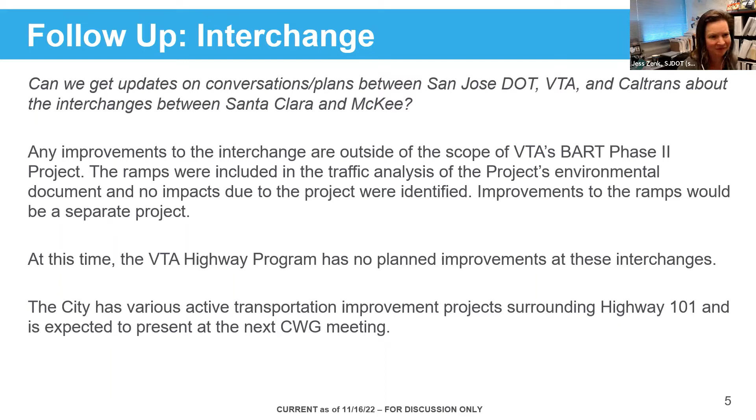Cool, thanks, Jess. Passing it over to Erica to talk a little bit about the role of the BSV External Affairs team. Erica, over to you. Thanks. Today, next slide. Just wanted to talk through what our team, who comes to meet with you quarterly, what our role is on the project, to make sure that you all have a clear understanding.

So our team falls into two major categories: community outreach and stakeholder coordination. Our team is made up of transit planning and engineering professionals. On the community outreach side, our activities are driven by the construction outreach management plan that we've developed and will implement as mitigation for the project, which we've been talking to you about. That includes the construction education and outreach plan, the construction transportation management plan, and the emergency services coordination plan.

As part of the COMP, the construction outreach management program, our team manages the public communication related to construction. We also support specific program efforts such as the historic building investigation and monitoring program, and lead coordination and facilitation of VTA hosted meetings and other various outreach activities.

On the stakeholder side, a major part of our stakeholder coordination is integrating with the design team to incorporate your community feedback into the project design. In addition, stakeholder coordination includes city and agency coordination with adjacent developers, and working through the contract-specific construction transportation management plans, working with the contractors, the cities, the stakeholders, and the community, which is also one of our environmental commitments.

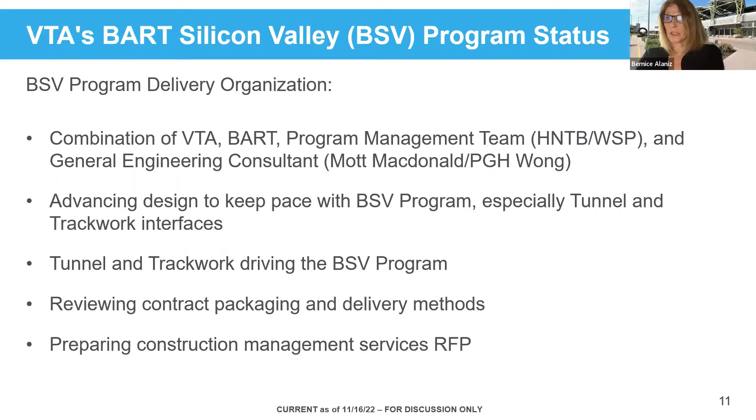You'll be getting a bit more update on the innovations - Doug's going to give you some details. That's been the effort between the program management team and the contracting team currently on board, and the future contracting teams. Right now the program management team and engineering consultants are working and reviewing the contract packaging and delivery methods, and getting ready to prepare the construction management services RFP, which we intend to put out sometime early in 2023, around the February timeframe.

Next. This shows you our delivery organization. As you can see, at the lead are stakeholders such as yourself, our city partners, the general public, VTA and BART. Then we have our program management team. They do the project engineering, contract management, and project controls related to cost, schedule, and risk reporting. We're also going to be doing an updated cost projection sometime around the February timeframe, and they put together the contract packages.

We have the general engineering consultant, who do the design services and design support during construction, reviewing all the designs and making sure plans and specifications are being followed and adhered to. Then we have the construction management team - that's the one we'll be putting the RFP out for in February. They're responsible for inspection and testing, project measurement of progress that consultants and contractors are making on project delivery, and for turning the system over to BART.

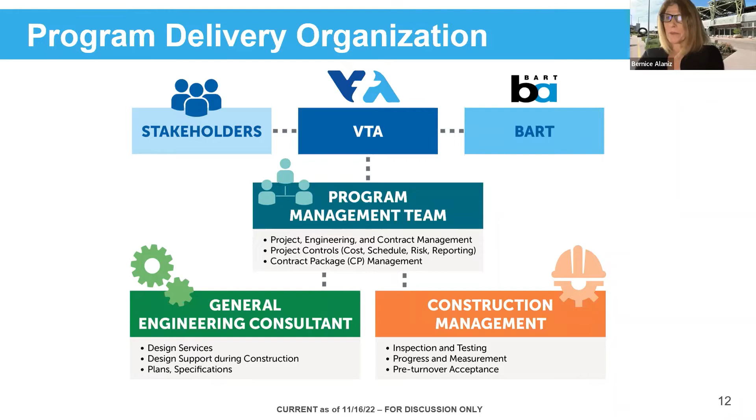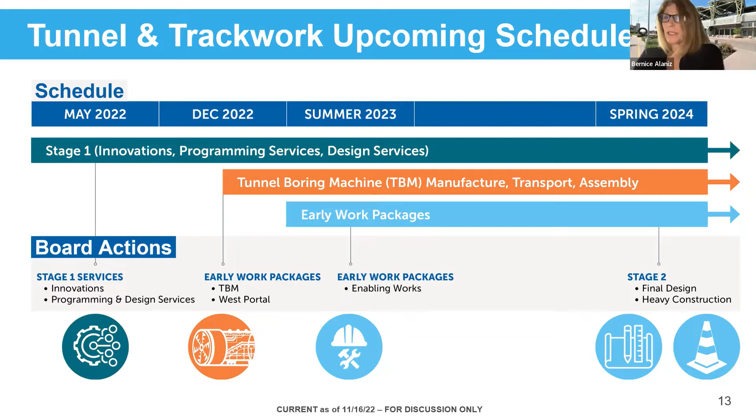And then early in the spring, summertime, we'll begin some of the early work packages at the station areas, like preparing the new haul yard and making preparations for the launch of the tunnel boring machine. And then we'll get into the heavier construction in spring of 2024.

So ongoing efforts - we've been working with key partners, including the City of San Jose and City of Santa Clara, on some efforts to enhance the passenger experience and access to and through the stations. We anticipate sharing some of the proposals related to station refinements at the board meeting in December as well. We have alternatives we're going to present at the Diridon and downtown stations, having done analysis on many of the implications of those proposed station refinement efforts. We've also been working with the City of Santa Clara on a west side underground concourse, in response to the city requesting enhanced access from the west side of the Santa Clara station.

So there'll be more on all of that out at the December 1st board meeting.

We had a visit from representatives from the Federal Transit Administration headquarters and our local arm, Region 9. They came out to visit the project along with our program management oversight consultant, which is a requirement in the federal funding programs. They monitor and track, and we have monthly meetings with them on all of our efforts. We did presentations, a tour of the alignment, and a meeting where they got an update on the project, on cost, including the future effort to do our new schedule and cost projection, and looking at the risks.

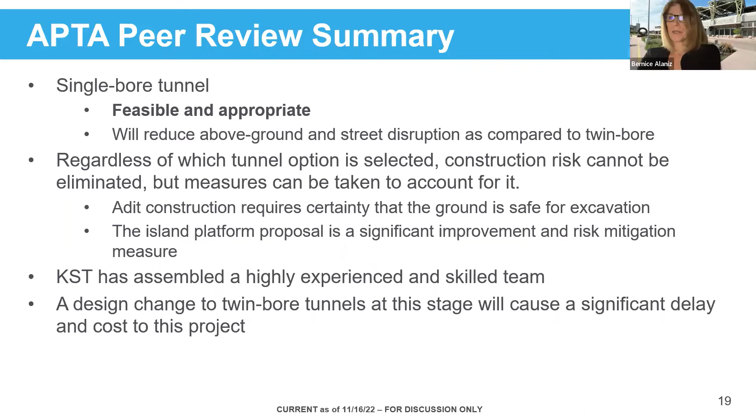I did give you a little update on the state funding, but as far as the federal funding, we were previously in the federal government's expedited project delivery pilot program. And that word pilot is really important because it was a new program and we were the first project and first agency to enter into that program. The whole premise of it was to expedite the process, but there was a constraint on the level of federal contribution. It was capped at 25%.

So we are now making a request to transition back into the New Starts program. It's the program that we used for the phase 1 project, and it allows us to basically double the federal contribution. So with that, we've already submitted a letter for transferring back. We had started out this project early on through that, and then when the new pilot program came, we moved to that. But now as we're transferring back, we've also requested a letter of no prejudice. And what that is, it basically allows us to continue on with activities like procuring the tunnel boring machine, doing some of the early construction works while we're waiting to get that full funding grant agreement.

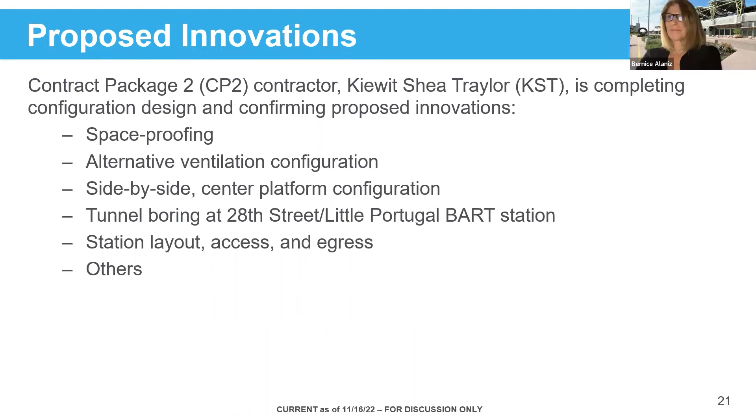Next slide, please. These were what we looked at in the innovations. As we are evaluating them, we looked at what were the implications related to future operations, maintenance, and of course safety, the overall passenger experience, constructability, was it feasible, can we do it? And then what were the implications about improving the cost and schedule?

I think I'm handing it over to Doug now, and you can go over some of the details of where those innovations are. Thanks, Doug. Yeah, thanks, Bernice. I'm really focusing in on the station refinement for the 28th Street Little Portugal station, just reiterating a little bit of what Bernice said to give some context.

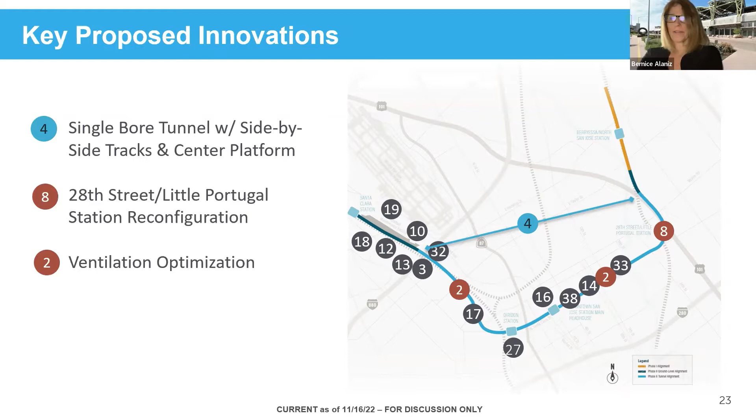So shown on this slide, these are the three proposed innovations that we shared at the last CWG meeting. Bernice mentioned the most important one, but one of the most important is this larger tunnel allows for the tracks to be built side by side on the entire length of the alignment. It also allows for the mid-tunnel facilities to possibly no longer be needed.

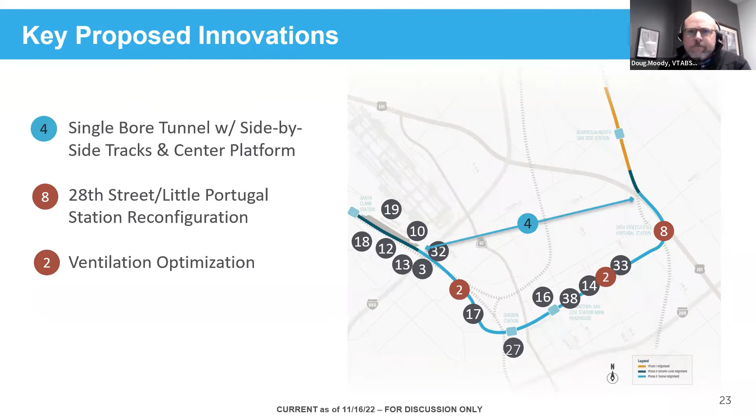But related to the 28th Street station, it also allows for the 28th station to be built largely within the tunnel, which can significantly reduce construction impacts associated with building the station. So as shown on this slide, by building the station largely within the tunnel, the amount of dirt that would need to be excavated and trucked out of the area is significantly reduced. Rather than having to dig and move approximately 3 football fields worth of dirt, the proposed innovation only requires the space in the little red box shown on the image on the right be excavated.

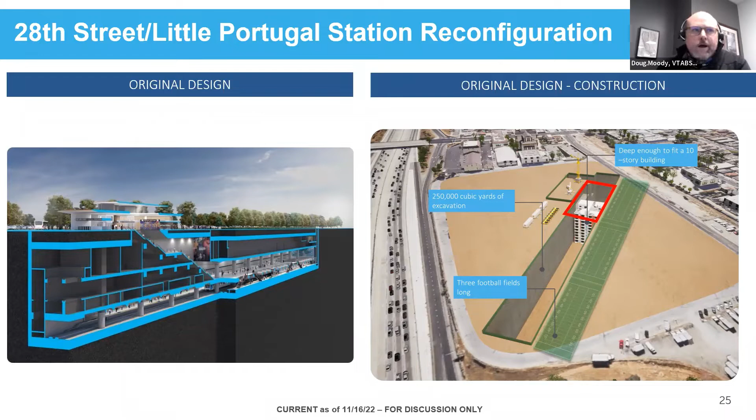So at the last CWG meeting, these are the two options for the station that we showed you that the BSV2 project was considering. And both of these options are much more implementable than the previous design and would have significantly less construction impact.

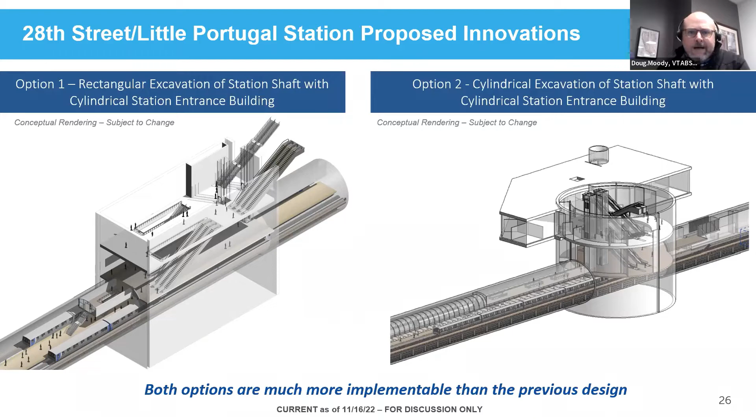The project team's currently advancing the rectangular shaft option that was shown in the previous slide as the preferred option, because it's better for passenger experiences. It's also similar to the previous design with much less construction impact. A rendering of the rectangular option will be shown on the next slide.

Some of the reasons it's better for passenger experiences: it has more direct and legible travel routes, which also contributes to perceptions of faster travel times through the station. It also provides better safety and security by providing more visibility, and it has better locations for art, since art can be located where it can be viewed by people while they ride down the escalator, like in the previous design.

Next slide, please. And then David, I'll go to you.

This slide shows a rendering of the rectangular shaft option that the project team's currently advancing as the preferred option for the station. The framing concepts for the station remain unchanged. It still provides direct routes to and from the trains, and the Portuguese design elements that fit and complement the surrounding neighborhood are still slated to be included. David, I see your hand up, so over to you.

How does this affect the head house, since we've already designed it? What's the story now? The head house, the above ground portion of the station, is essentially the same. Okay, that's good. Good to hear it.

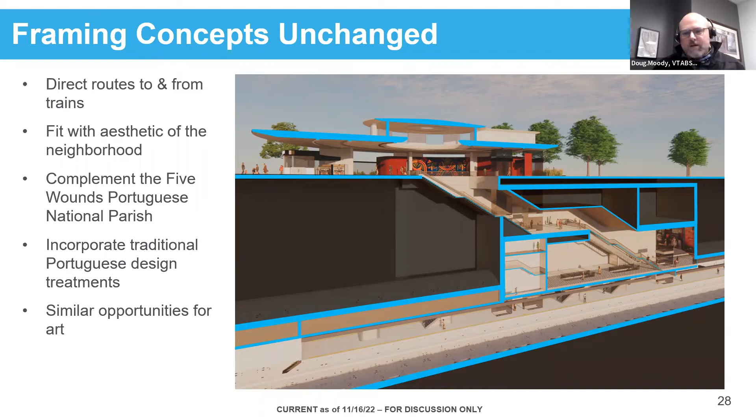Are there other questions for me or Bernice, or comments? Seeing nothing in the chat, seeing no other hands up, and not hearing from anyone, we're going to go over to Ron Golem, VTA's Director of Real Estate, with some updates on real estate and acquisitions.

Great, thank you, Doug. Boy, this is a lot of information we're putting out here. So I know it's kind of a fire hose, but let me just give you an overview both about real estate and kind of where we stand right now.

The first slide is really about understanding our process: when the board of directors of VTA adopted the environmental clearance in 2018, the environmental document analyzed all the alternatives and identified the properties needed for the project, and all the property owners were notified at the time. That provided the legal authority for VTA to acquire the property needed to build the project and the specific parcels. Our process since then, as we've been refining the design, is thinking about how we can reduce the number of properties and the amount of impacts that are going on.

I should also say that right after the board adopted the environmental document, we adopted the relocation plan. That involves sending notices out to all the occupants, residential and commercial, in the parcels that might be needed for the project, letting them know about the project and the kinds of relocation assistance they would require. The relocation plan takes that information and talks about all the assistance people are entitled to, including help finding new spaces, assistance with moving costs, assistance with rent differentials, and so on, and about how we're going to go about doing all of that. That was the final relocation plan.

We have a web page with links at the bottom here for VTA's BART Phase 2 real estate. If you go to that page, there are two documents that might be of interest. One is the final relocation plan I just described. The other is with respect to the eminent domain process, because it's very different than how most people think real estate works. There's a handbook called Your Property, Your Rights, which we give all property owners that explains this process when we start engaging with them. That handbook's on the website as well, and it can give you a deeper dive on that.

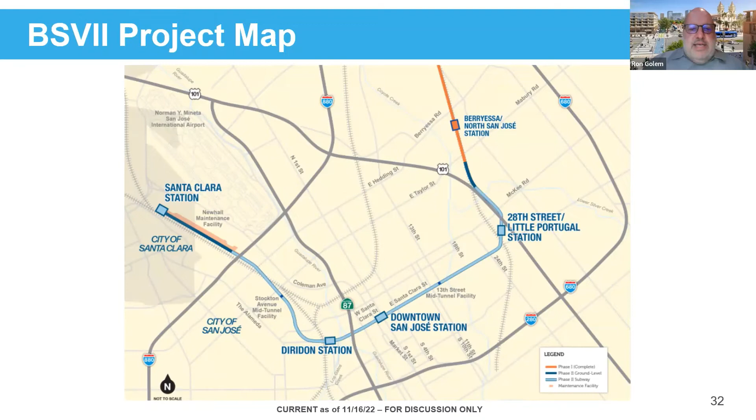Next slide, please. Of course, you're all familiar with the project and the stations. If I could have the next slide, please. Just to give you an overview of what the project involves, at this point there are 85 properties that we need to acquire for the project. Now, that doesn't mean we're buying 85 properties.

There's really a combination of different kinds of interests, and actually some properties have more than one type of interest. So I might need one type of easement, and then maybe we're buying a portion of the property and so on. That's really for the alignment we had in the prior slide.

Just to give you a little bit of a breakdown: full fee, where we buy the entire property, is about 9 of the 85 properties. Temporary easements related to construction or permanent easements for design needs and so on are about another 30 of the properties. But the single biggest category of acquisitions is tunnel easements.

Where we build in the public right-of-way, primarily along Santa Clara Street or Stockton Avenue in the alignment, that's per our statutory authority. But where the tunnel takes turns - coming from Berryessa and going under 101 through 28 to get to Santa Clara, coming off the Alameda and swinging up Stockton, leaving Stockton and going north under 880 - we're going under private property and we have to acquire tunnel easements from them. I'll talk about that more in a minute.

In terms of where we are, we've made offers for over half the properties we require, 48. And we've already started the appraisal process, which is the first step in acquisition, for nearly three-quarters of the property. So we are very much in the peak period right now of acquiring the property needed for the project.

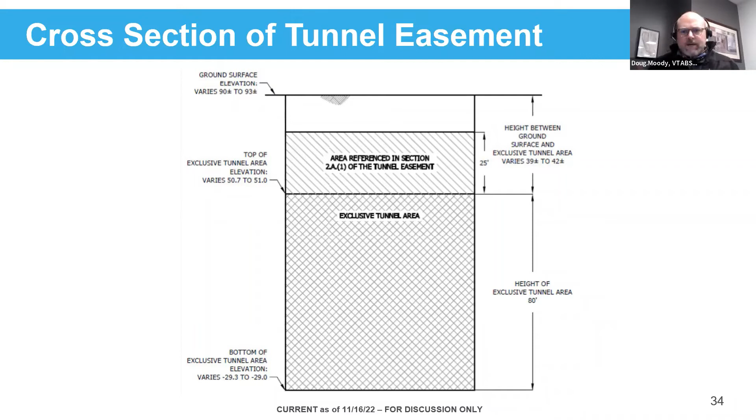We're officially at time, so I'm going to move us on to the next topic. We're still on real estate, but moving over to the TOD group and Ron's group with Christina Gotuaco and Roy Mann, talking about some planning efforts under one umbrella. There's a comprehensive effort to plan around the 28th Street/Little Portugal Station and the Five Wounds Urban Village area, the largest urban village area, which also touches other urban villages. There's some conversation about the naming convention that I'll let Christina and Roy get into. Over to you.

Okay, I'll start with this first slide. Apologies for Charla Gomez - there's a comprehensive planning effort underway, but Charla is out of the office right now, so we're presenting this slide on the city's behalf. They've done a magnificent job working with a number of consultant groups with varying types of stakeholder, neighborhood, and community engagement. Here's the scope: the study area is consistent with the Metropolitan Transportation Commission's recent transit-oriented community policy within a half-mile radius. Each of these 4 bolded station areas are going to become one station area plan eventually.

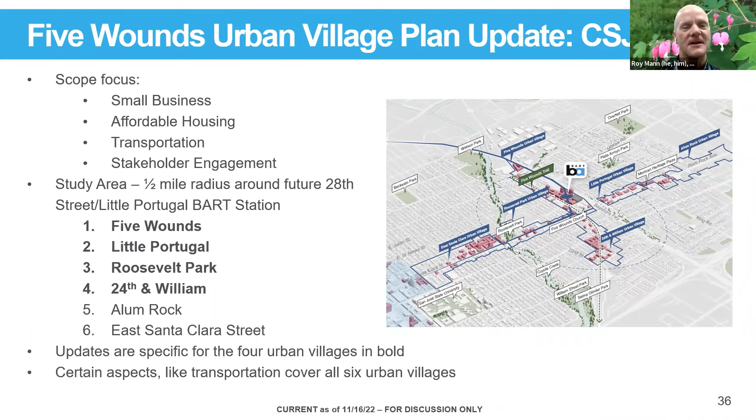Next slide please. The design development framework is another effort underway, more specific to the VTA-owned properties. The concept is to help guide developers who will evaluate proposals and deliver something that benefits the neighborhood, consistent with all the many planning activities that have already taken place, including the En Movimiento plan and the Communiversity plan, which isn't pictured here but is worth noting. You can see in red the subject properties that are part of this design development framework activity. Next slide please, Christina.

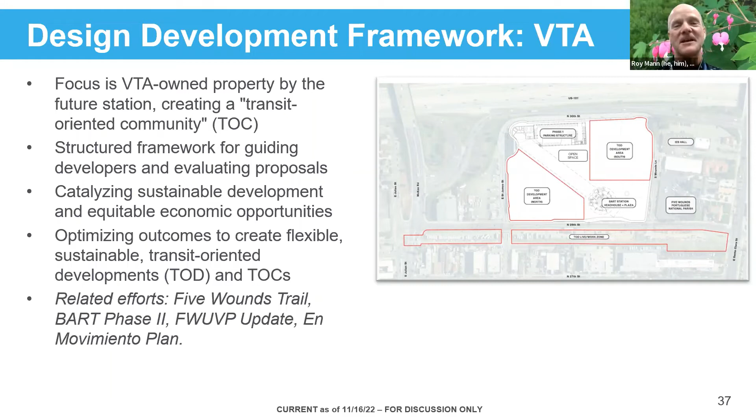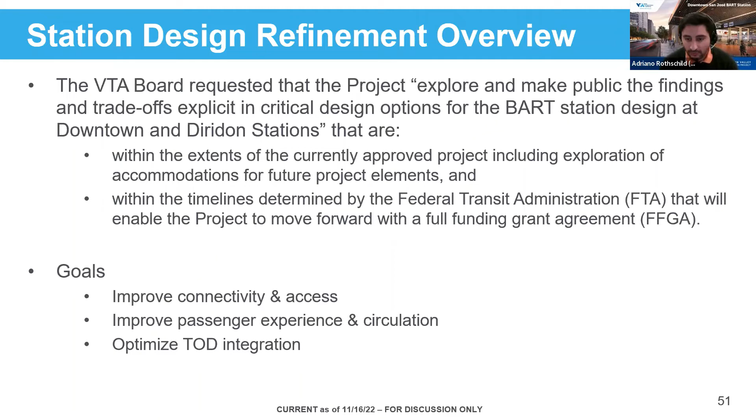So the effort kicked off in early June and included 7 collaborative workshops with VTA, BART, and the city of San Jose. In mid-September, we were here to present an overview of the outcome of the initial concept development effort and Tier 1 evaluation, which focused on passenger experience and urban design. Since then, we've continued to advance the preferred concepts with the goal of developing an implementation assessment and looking at cost, schedule, construction impacts, things like that.

So we've been working to develop draft recommendations. That's where we are today. We just had some of the implementation assessment key pieces come in late last week, so we're still very much in the middle of all of that, but are working towards a presentation to the VTA Board of Directors on December 1st.

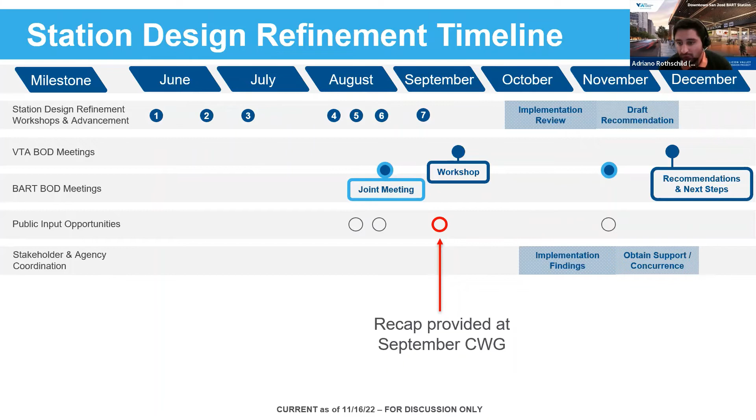As a reminder on the overall process, we brought various evaluation criteria to the CWGs and to the larger community to get a sense of what elements are most important to the community. Based on that, we conducted a passenger experience and urban design evaluation with the City of San Jose, BART staff, and SPUR, and have since advanced the concepts enough to conduct a technical and feasibility analysis. So we're on the tail end of that third step right now, trying to figure out what our next recommendation will be.

So just a brief reminder of what we're looking at specifically for the downtown. We're really looking to reduce the number of escalator switchbacks. I should note that since the effort started, the tunneling contractor did propose an innovation for a center platform tunnel, and that allows for even further improvement to the vertical circulation in the downtown and Diridon stations.

So at the downtown, the key focus was looking to reduce the number of escalator switchbacks, and additionally what opportunities there may be for increased TOD above the station head house and what opportunities there might be for TOD at the ground floor.

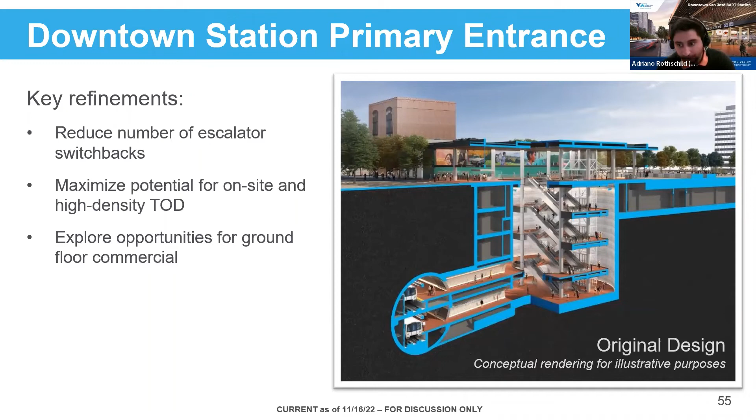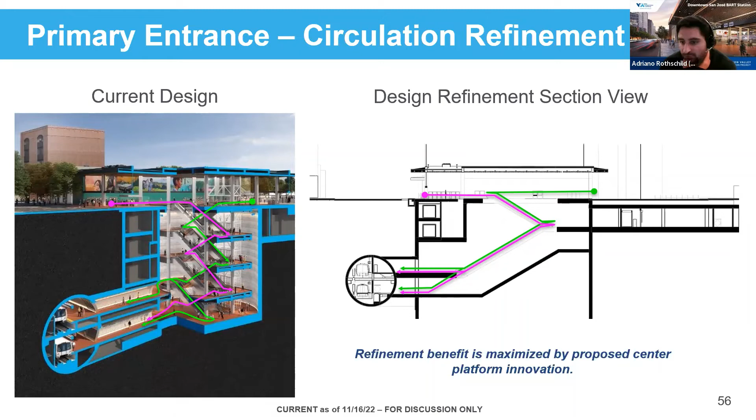So the biggest change that we've done in the downtown is that the concept rotates the escalators from an east-west orientation to north-south, and we have a rectangular longer excavation that really allows us to limit the number of switchbacks to the one switchback that is on that first level below ground. And as you can see here, the proposed tunnel innovation would really eliminate the need for that additional run going all the way to the lower level.

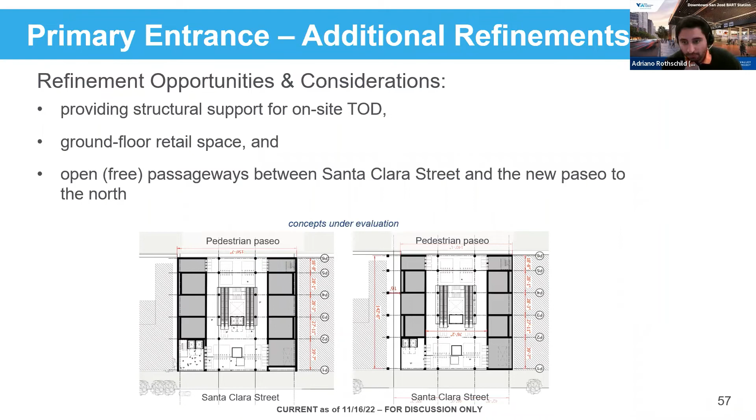Additional things being considered are the ability to provide structural support for on-site TOD. Just as a reminder, transit-oriented development is not part of the federally funded project, but with that said, we are including an option for TOD support and structural support to accommodate that. We're also looking at opportunities for ground floor retail space, which was one of the desires we heard from the community, and whether a free passageway between Santa Clara Street and the new Paseo on the DDF block could be provided. So those are still elements under consideration.

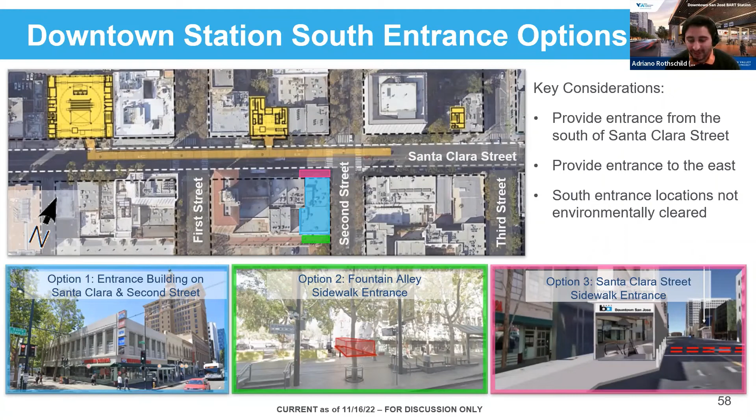Additionally, for the downtown station, there's been a lot of desire for a station to the south of Santa Clara Street. The proposed tunnel innovation with a center platform does really facilitate that connection. We have continued to talk with the FTA and the city of San Jose to determine the feasibility of using a historic property on the south side, and are still in conversations about that.

At Diridon, the primary focus is to really look at opportunities for integrating the station with the future disc concourse, the northern concourse, and also what opportunities there might be for high density TOD on the site.

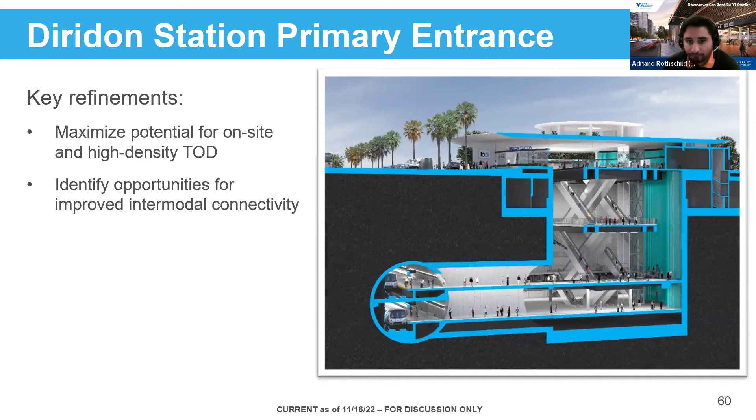The refinements also look at a rectangular excavation to really try and minimize the footprint of the Diridon station. So we're looking at a couple different concepts that can do that, and looking at some back of house redesign as well to try and optimize the opportunity for transit oriented development, whether it be facing Post Street as shown here, or potentially facing Montgomery.

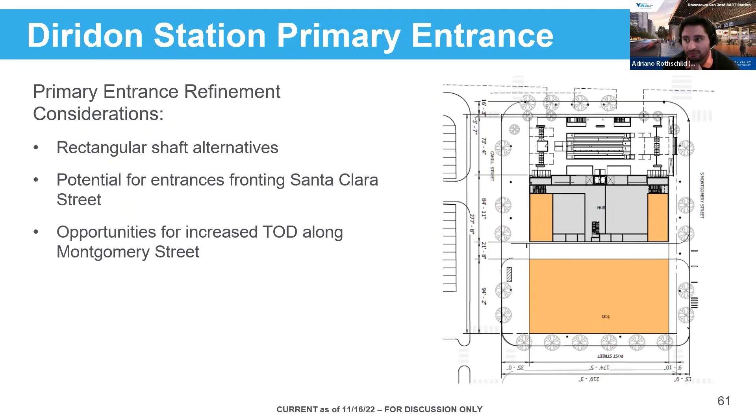And additionally, we have looked at the feasibility of the second entrance at Diridon. This would be located west of the existing railroad tracks, just east of White Street. We have a vent and emergency egress facility there already, and have been coordinating with the property owners, JPB, Caltrain, and High Speed Rail to make sure a future entrance there could be included.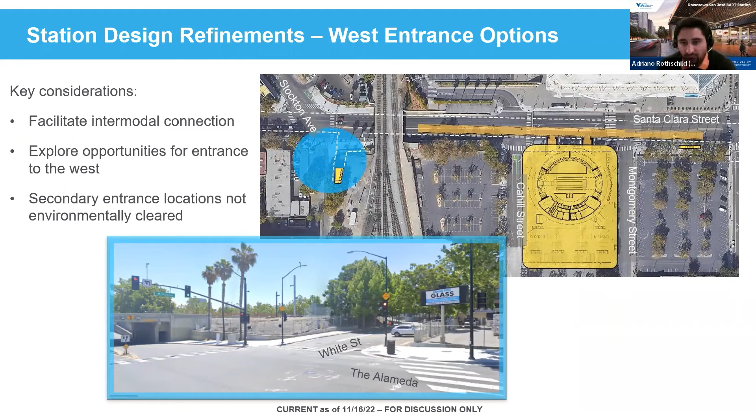So next steps - as I mentioned, we've just finished the implementation assessment. We're reviewing cost estimates that have come through and starting to put together our recommendations. We'll start sharing findings later this week, early next week, and we'll be presenting the recommendations to the VTA Board of Directors on December 1st. If you're interested in the outcome of this effort, tune into that meeting, and we'll follow up with a blog post in December as well.

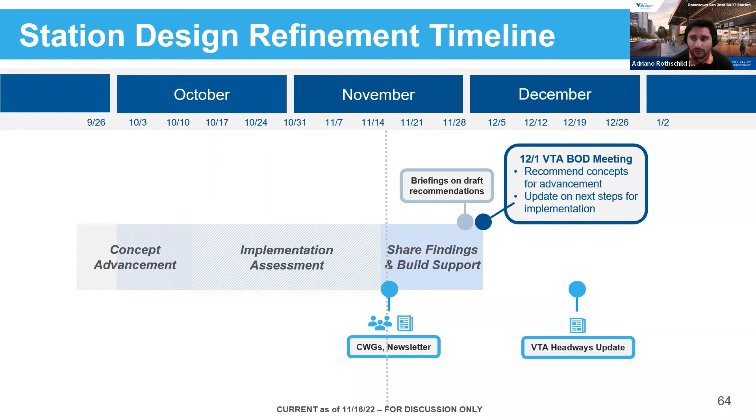That is something that is still being considered. We are looking at the opportunities for a full second entrance on the south side, as well as whether a sidewalk style entrance would be appropriate. That final decision hasn't been made, but it is still being studied, and at minimum we would include accommodations for that connection to be made in the future. I think it's a really important aspect of both stations, Diridon and downtown, to be able to gain access to the station from both sides.

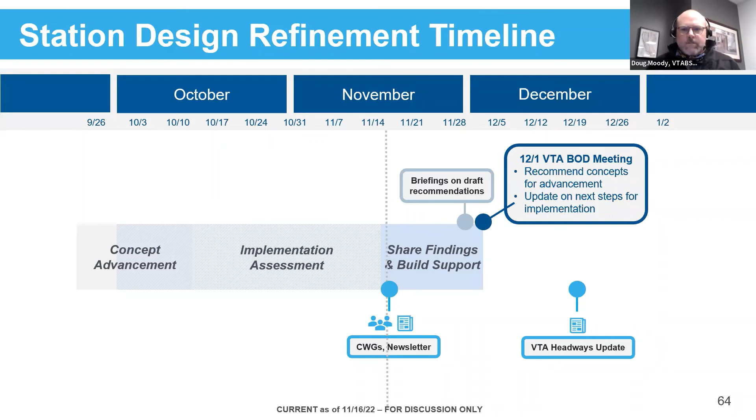Thank you. As I mentioned earlier, VTA has developed and will implement the Construction Outreach Management Program to meet our environmental commitments. The purpose of the COMP is to minimize and reduce construction related impacts to the extent feasible on the community, and to inform the public and other stakeholders of the construction schedule and associated activities. We've talked about the various plans here in the CWG meeting numerous times.

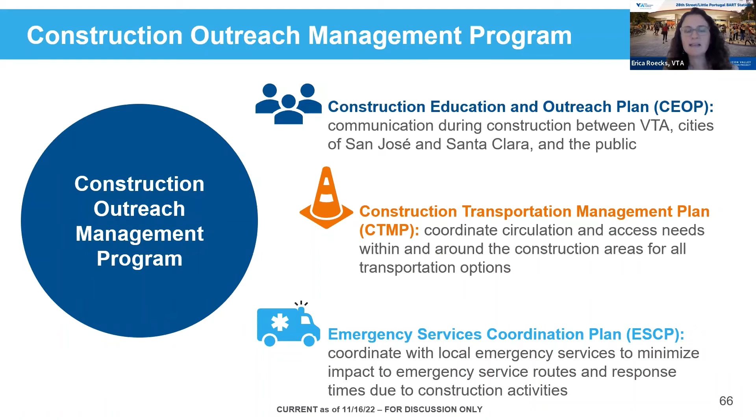Next slide. I wanted to do a quick deeper dive as we have an update on the Construction Transportation Management Plan. To reiterate, the purpose of the CTMP is to minimize and reduce, to the extent feasible, construction related transportation impacts to all modes during construction. We have the draft plan thus far, and once the contractors are on board - the first contractor is already on board...

We'll be developing contract-specific CTMPs. These will identify construction details which will create disruptions based on selected means and methods. We'll identify how and when to communicate the disruptions to stakeholders in the community, and we'll work in hand with the Construction Education and Outreach Plan to communicate as such.

The plan will also be used to establish the baseline for developing the traffic control plans as they're needed. The CTMP will not impede construction to eliminate travel and access disruptions, or eliminate the construction related impacts overall on the project.

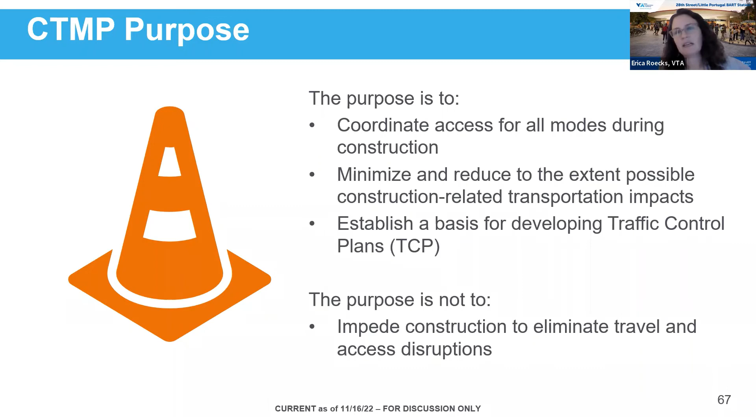Next slide. As we've talked about previously, and presented on the draft plan, we are now engaging on the development of the first CP2, Contract Package 2, where Kiewit Shea Traylor Joint Venture is the contractor for that first tunnel and track work contract. We're starting the development of that specific CTMP, and I wanted to touch again on the engagement process related to that.

We will have regular coordination meetings between KST, the contractor, VTA, and the city. We had our kickoff meetings with both cities this week for this first effort. In addition, we'll have regular coordination meetings with adjacent businesses and institutions throughout the development to provide input, and we'll be hosting public meetings, depending on the extent of the CTMP, to give the community an opportunity to provide input on the draft.

Next slide. So the first CP2 specific CTMP will be for early works at the west portal only, denoted as number 1 on the graphic, which is where the tunnel boring machine will eventually launch to start the tunnel. The CTMP will cover preparing VTA's owned Newhall Yard property with site grading and preparing the support of excavation for the tunnel boring machine to be assembled and then eventually launched.

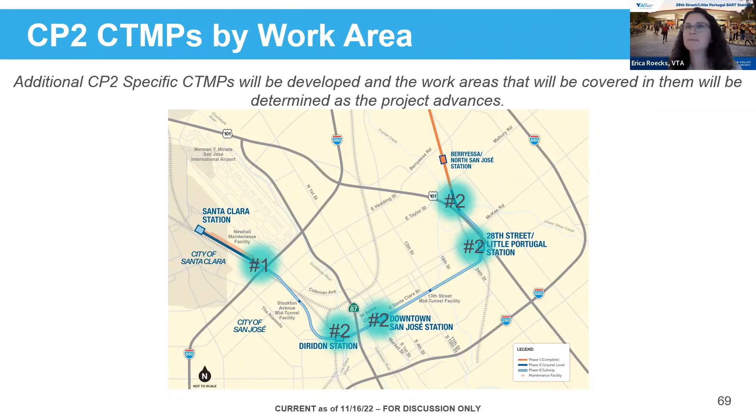All right, stay tuned. I wanted to give you a brief summary of our 2022 engagement efforts. From June until October this past year, we had the opportunity to engage at different tabling events, a total of 13 different events, including our community social, and we were able to engage around 1,400 people. Specifically within the 28th Street Little Portugal area, we attended 4 different events. Thank you to those of you who also provided feedback as to which events we should attend.

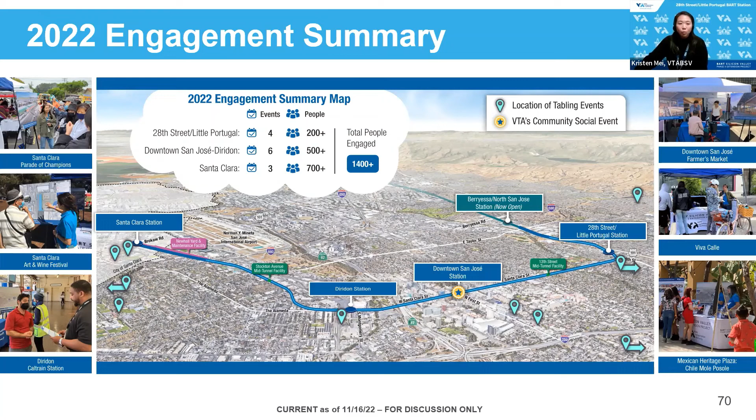We're always open to hearing your feedback and hearing which events we should get plugged into and get on the ground at. Specifically in the past few months, we had the opportunity to take part in Dia de Portugal in June, the Mexican Heritage Plaza Mercadito in July, the Chile Mole Pozole in September, and the Alum Rock Farmers Market in October.

We wanted to take the chance to engage with you folks and get a sense of any further events we should be participating in for the coming year and beyond, and also other community organizations and agencies or groups we should be engaging further. If you have a device, whether your phone or laptop, scan this QR code or go to Mentimeter at www.menti.com and use this code. I'll switch screens to Mentimeter and share the link in the chat.

Our first question: what are other public engagement events that we should be participating in, not just limited to the 28th Street Little Portugal area, but even along the alignment or beyond? We're open to all suggestions that you have for us. If you have any issues connecting to Mentimeter, feel free to raise your hand and share it verbally, or enter it in our Zoom chat as well. I'll give some time for feedback and wait for it to settle out.